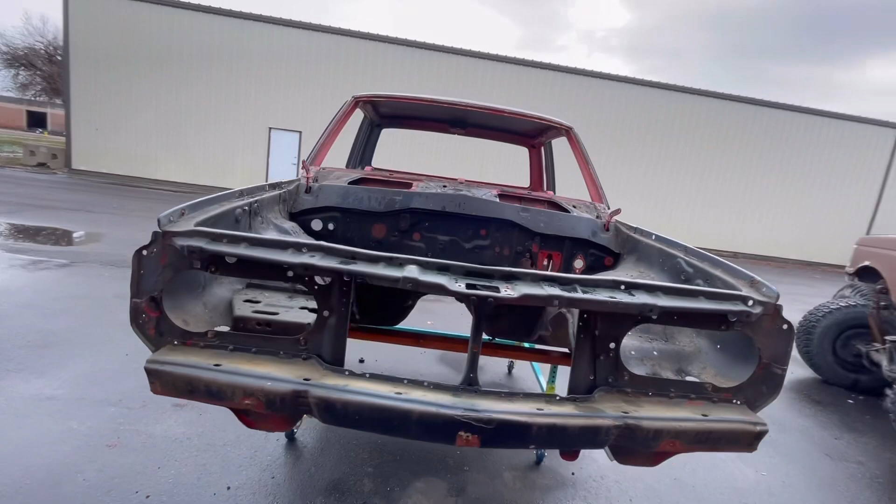So I'm Uncle Thor, and I'm going to teach you how to build a really sweet cab and bed cart. This whole cart is built out of 1.25" tube and 1.5" tube, 1/8" wall on both, so they slide in and out of each other like they should. I did my top caps out of 3/16 plate I had laying around. The feet that I put the casters on are just 1/8" plate I had laying around.

The casters came from Harbor Freight, just cheapo 250 pound blue plastic nylon ones. They're not that great, but I just needed something cheap. I either needed to go buy a bunch of jack stands to set this thing on, or build a dedicated cart I could roll around my shop and make life easier. I built the cart cheaper than I could buy the jack stands.

Now, I did have the plate laying around, I had the hardware laying around, I had 2 of the 4 casters laying around, and I had 24 feet of the 1.25" tubing already on hand. So the only thing I had to buy was 2 casters, spray paint, and a 10-foot stick of 1.5" 1/8 wall tubing. This all came together real quick, real easy, and for my purposes it works absolutely great.

I highly recommend it for you too. You can modify it and do whatever you want. Like if you need some other way to hold something, different feet, cut off whatever you did, weld up whatever you need for the next project. Who cares? It's perfect for that.

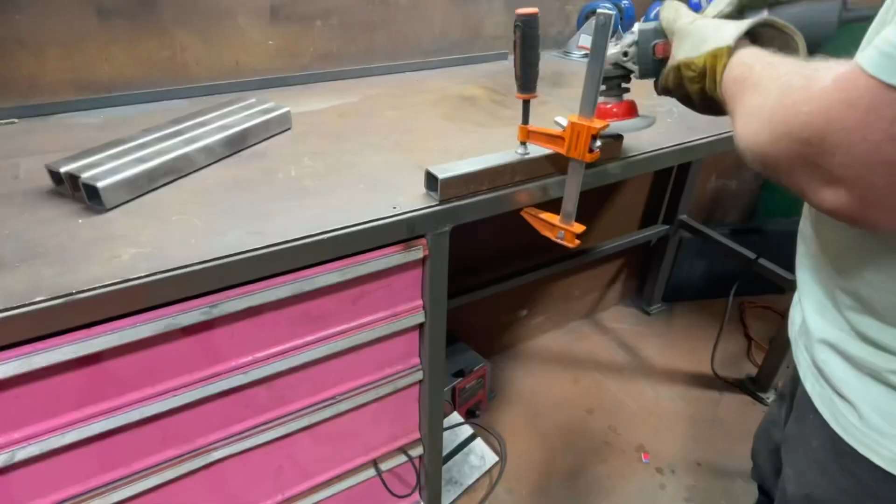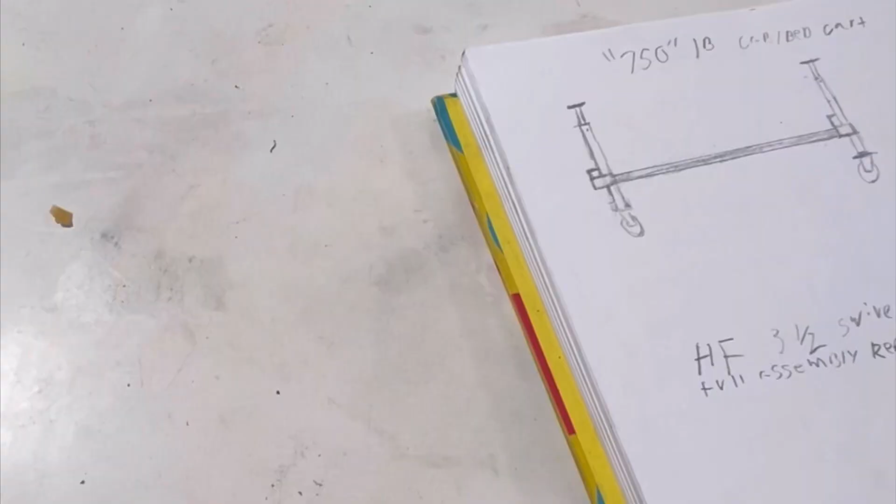I need a bed dolly and I need a cab dolly. So we're gonna build one, and this is how I'm gonna do it. It's gonna look something like that, right there.

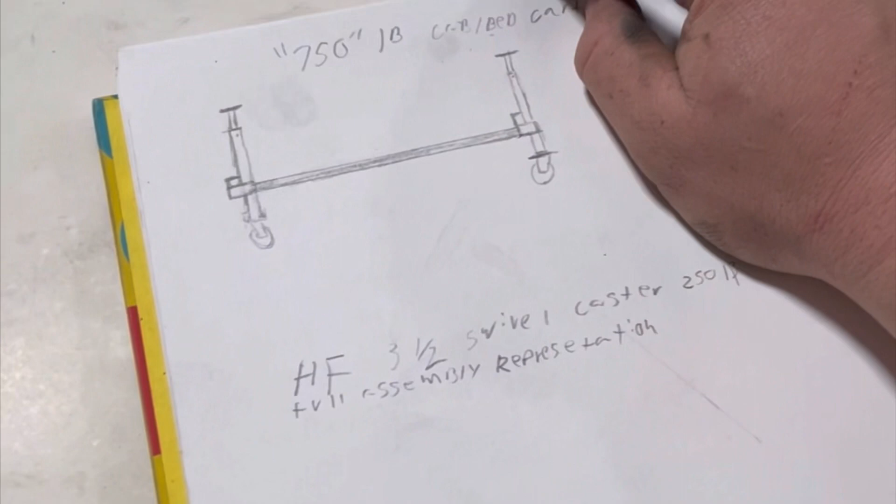Here's all the individual parts. Helps if I flip it the right way here.

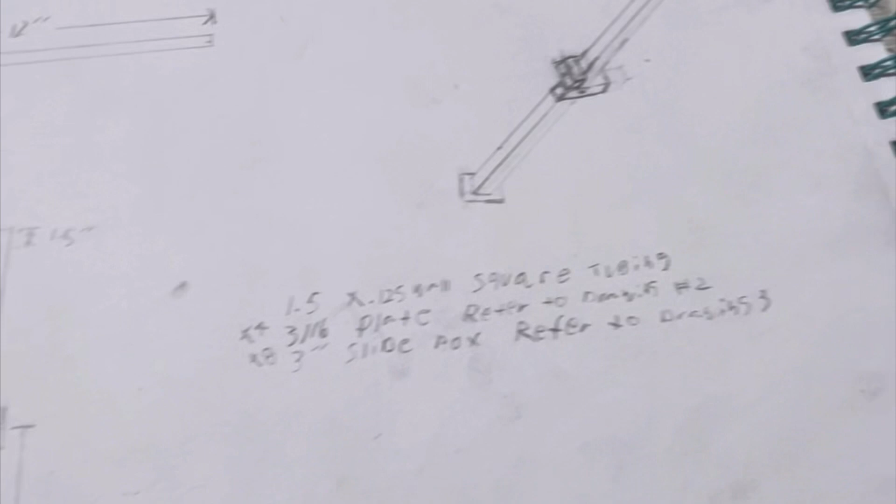So there we go. Let's proceed on now.

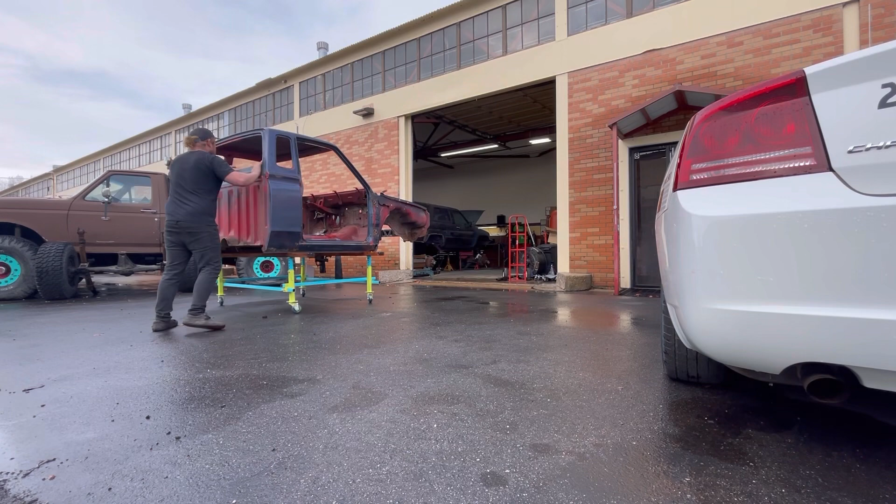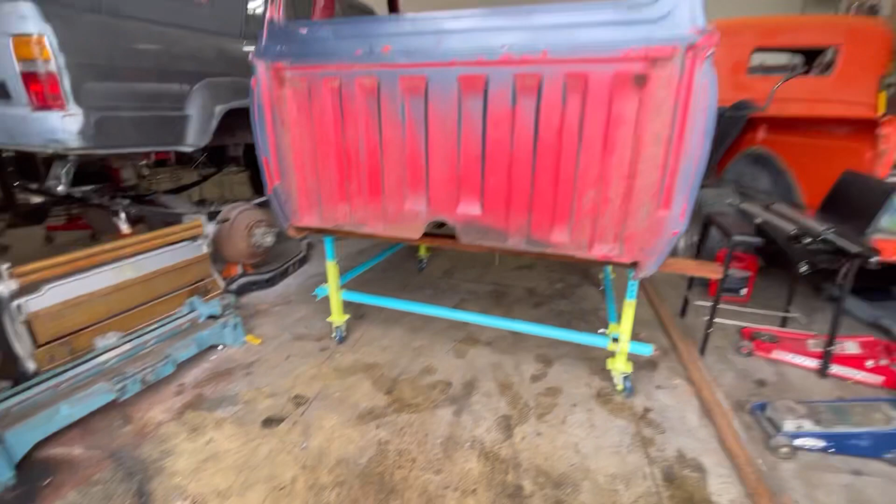Excuse my mess I have here in the corner, but here it is, it rolls around. I can now do the sheet metal work on this thing. The cart worked absolutely flawlessly, I'm super stoked on that.

Now we're gonna get this cab fixed up. Go ahead, like and subscribe, especially if you like the way I built my cart.

Understand that you can take all of these dimensions that I built this thing out of and adjust them to your specs. The blue bars that I used in here can be adjusted to different lengths to suit different cabs, different beds, whatever you need it to be. I did mine 60 by 48 because I figure that's good enough to get any truck bed or any cab on it that I'd need for the most part.

I did have to sit this one up on 2x4s to really make it sit okay, but it works, I can do what I need to do with it, and that's great. I can break this cart down, put it up on my pallet racking or in the corner, and it's not in my way. It's not just a big weird thing that's a problem. So that's another thing I really, really like about it.